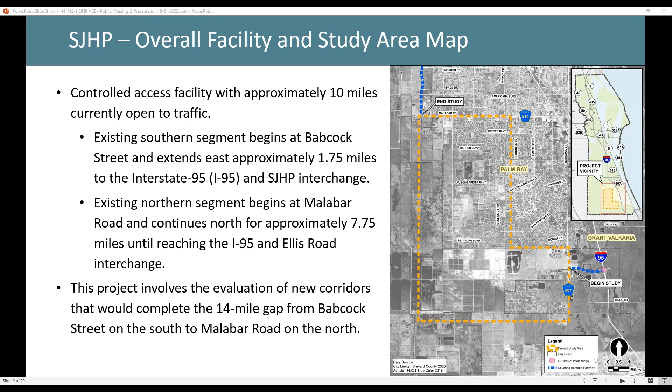The purpose and need for the project is based on two main items. The first is system linkage, meaning we are evaluating filling the approximately 14-mile gap in the St. John's Heritage Parkway between Babcock Street and Malabar Road. The second item includes economic development. The City of Palm Bay has the project documented in their comprehensive plan and plan for the integration of future land use and transportation.

An alternative corridor evaluation, or ACE study, is the first phase in the transportation development process involving new corridors. Through the planning and environmental linkages process, it allows for decisions made during the ACE process to be used to inform the NEPA process. The ACE process follows FDOT's process and establishes the project's purpose and need. It defines the environment of the project area using land suitability and resource mapping.

It proposes improvements to address the project need and identifies potential environmental impacts. The study evaluates engineering feasibility and identifies fatal flaws. Public involvement and agency coordination is included in the study. This process is fully documented.

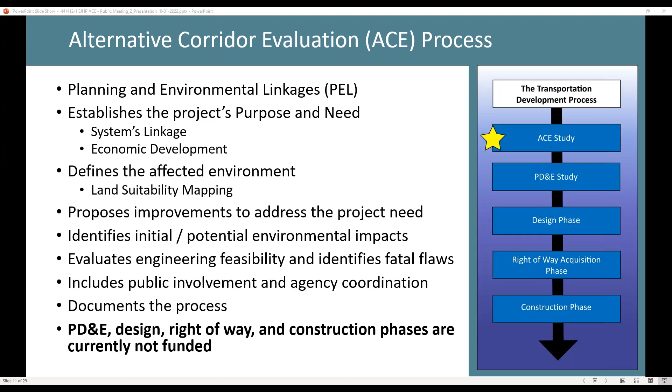The goal is to identify potential corridors to be evaluated in detail at the next phase, being the Project Development and Environment, or PD&E study. The next phases of the project, including PD&E, design, right-of-way, and construction phases, are currently not funded.

The ACE process does not include identification of stormwater ponds or floodplain compensation sites, structural analysis, survey, detailed field surveys, such as surveys for protected species, contamination, etc., mitigation measures, air and noise evaluations, cultural resource evaluations, Section 4(f) evaluations, permitting, adjacent land use issues, such as prescribed fire or roadway alignments.

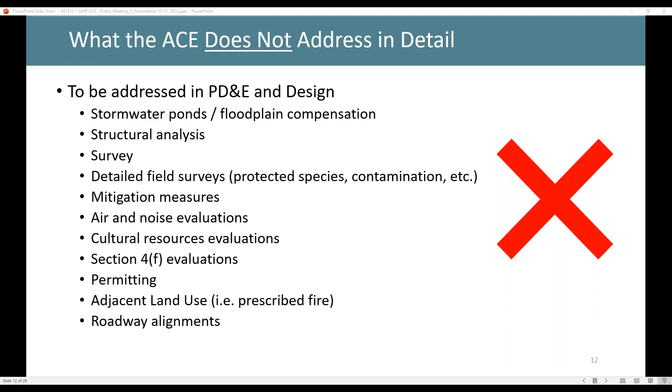These items would be addressed in future phases, such as the PD&E study or design, if the project is funded and moves forward. The study began in January 2020. Activities completed to date include the future traffic analysis, the development and refinement of corridors, development of the methodology memorandum, and development of the draft ACE report.

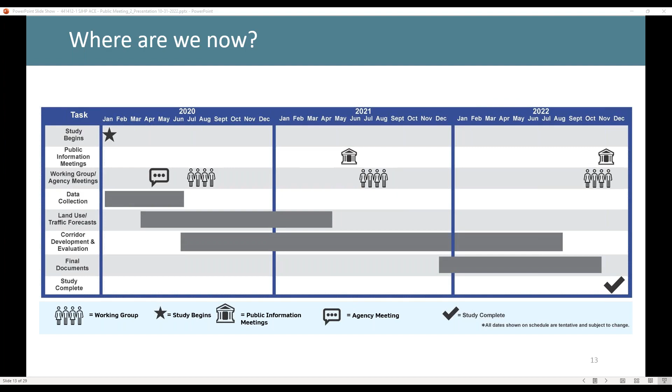Meetings have also been held with the Environmental Technical Advisory Team, Working Group, and the public. The draft ACE report is currently under review by FDOT's Office of Environmental Management. The study will conclude this November.

Land Suitability Mapping, or LSM, is a mapping methodology that incorporates and evaluates several different geographic information system, or GIS layers, related to cultural, natural, social, and physical environmental resources. This map shows how LSM is used when evaluating areas in which to develop new corridors. It helped to identify areas of avoidance and areas of opportunity where corridors could be developed. Stacking the GIS data creates a shading effect that increases in darkness in areas where multiple resources are present.

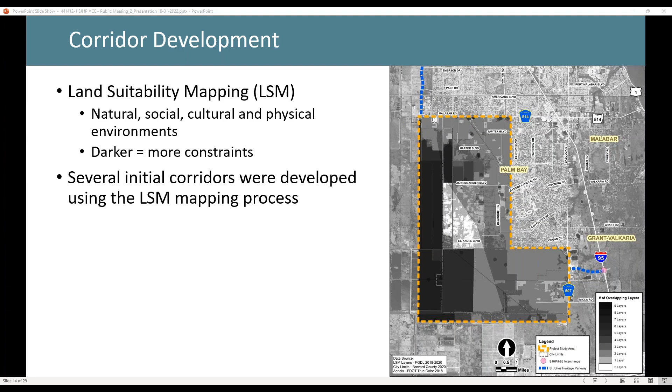Several initial corridors were developed using the LSM mapping process. The land suitability mapping process was used to identify several potential corridors. The map to the left shows all the corridors laid out in what we call the spaghetti plot. The map on the right shows the 5 potential alternative corridors resulting from the initial evaluations.

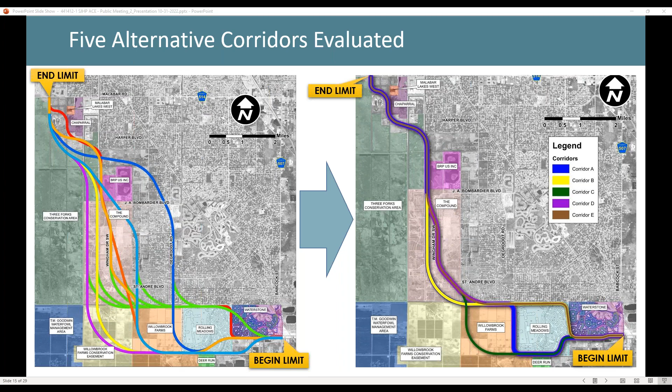To document how the 5 alternative corridors would be evaluated, a methodology memorandum, or MM, was developed to document the various factors that would be considered. This methodology memorandum was reviewed and approved by the FDOT Office of Environmental Management on September 15, 2022.

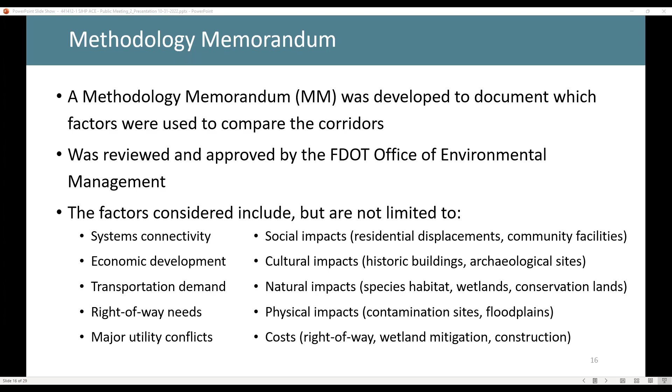The factors considered include but are not limited to systems connectivity, economic development, transportation demand, right-of-way needs, major utility conflicts, social impacts, including residential displacements and community facilities, cultural impacts, including historic buildings and archaeological sites, natural impacts, including species habitat, wetlands, and conservation lands, physical impacts, including contamination sites and floodplains, and costs, including right-of-way, wetland mitigation, and construction cost.

The corridor alternatives developed were evaluated based on avoidance and/or minimization of potential impacts to environmental resources, engineering feasibility, project costs, and agency and public input. These evaluation criteria allowed for the corridors to be compared on an equal basis.

Additionally, and for the sole purpose of evaluating the corridors in the ACE process, resources and impacts that were common to each alternative and therefore not contributing to the overall evaluation process were not considered. All impacts and affected resources will be evaluated in the PD&E phase of the project.

The rankings assigned range from 1 being the best or having the fewest impacts to 5 or the worst with the most impacts. The lowest overall total score represents the best alternative. Any changes in conditions after the ACE study will be evaluated in the PD&E study phase.

Social impacts evaluated include the number of potential residential and non-residential displacements, community facilities and neighborhoods impacted, impacts to special populations, and the amount of acreage impacted to planned developments and prime farmlands. Each criterion for each corridor was rated between 1 and 5. Alternative C had the lowest or best score with an overall score of 5, followed by Alternative A with 11, Alternative D with 13, Alternative B with 16, and Alternative E with the highest or worst score of 18.

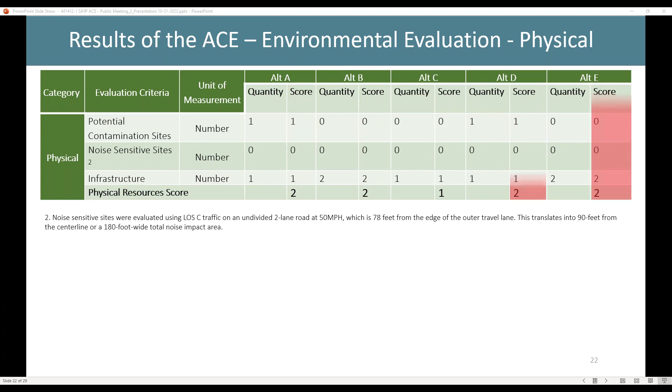Impacts to the physical environment include the number of potential contamination sites, noise-sensitive sites, and infrastructure. The criterion for each corridor was rated between 1 and 5. Alternatives with the same number of impacts for each criterion were rated the same. Alternative C ranked the lowest overall with a score of 1, and alternatives A, B, D, and E all ranked a score of 2.

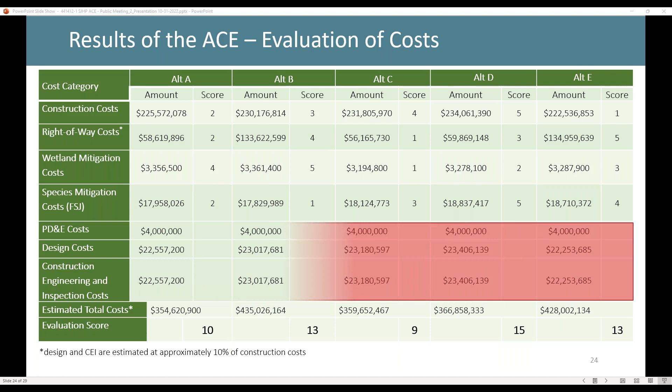Corridor C received the lowest score of 9. Corridor A received a 10. Corridors B and E had a total evaluation score of 13. Corridor D had the highest total evaluation score at 15, with the highest construction and mitigation cost estimates. PD&E, design, and construction engineering and inspection costs were not used in the scoring.

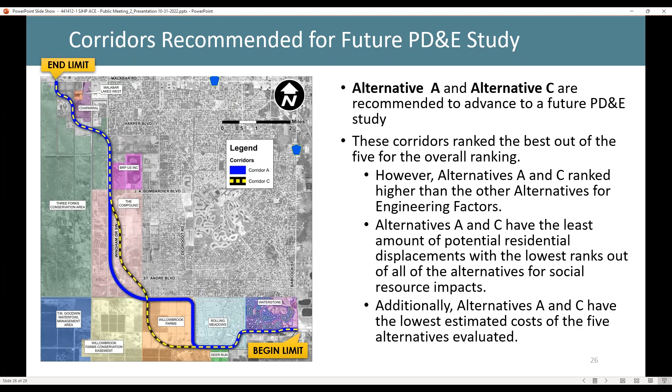Brevard County has determined that a formal recommendation be made to advance Alternative A and Alternative C to a future PD&E study. These two corridors ranked the lowest out of the 5 evaluated. Alternatives A and C did rank higher than other alternatives for engineering factors. Alternatives A and C have the fewest number of potential residential displacements and have the lowest rankings for social resource impacts. Additionally, alternatives A and C have the lowest estimated cost of the 5 alternatives.

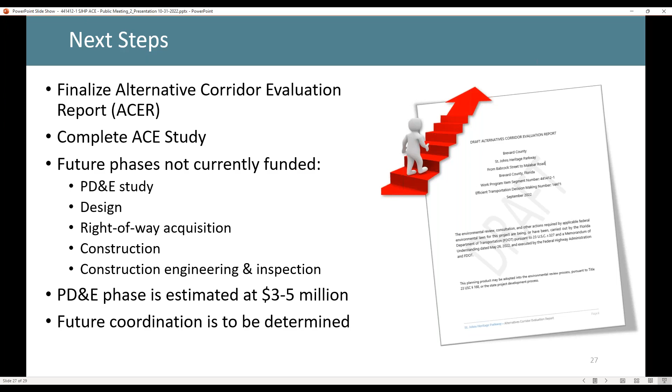The next steps include finalizing the Alternative Corridor Evaluation Report, or ACER, and completing the ACE study. Currently, future phases of project development, including the PD&E study, design, right-of-way, construction, and construction engineering and inspection, are not funded. The PD&E study is estimated to cost between $3 to $5 million. Future coordination regarding funding and project development will be determined at a later date.